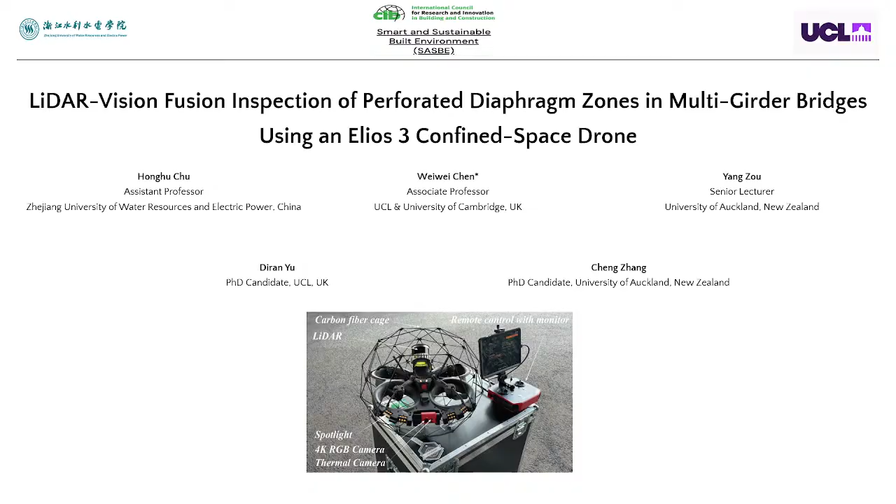Okay, let's see the problem statement. As we know, there are inspection challenges for bridges, especially the corners under the bridge, the deck part. In multi-girder bridges, the underdeck is usually deep, narrow, and also very dark. So the environment is not perfect for us to detect. Based on the difficulty for human beings to inspect, we want to see if there is any better solution we can provide to address this problem.

So first, the GNSS signal is blocked by the bridge deck. Secondly, the illumination is very limited because it's very dark. And thirdly, the available headroom and the line of sight are highly constricted. So in many cases, inspectors need scaffolding, lifting equipment and rope access, but it's very risky. Another challenge is about the data quality.

Manual inspection often depends heavily on the inspector's experience, and quantitative and traceable documentation is also limited. So the key research gap is that most existing UAV workflows focus on the external bridge surface, but robust inspection is not very good, especially for the underdeck cavities. So that's why we focus on this problem.

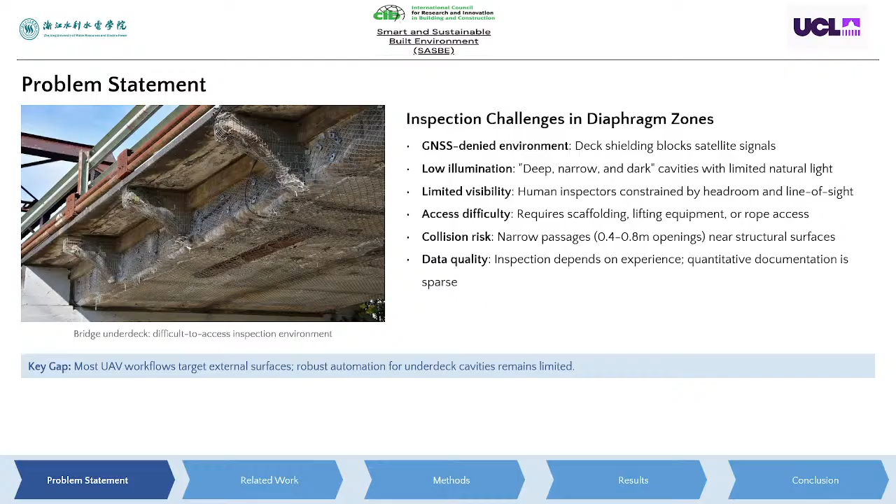As I mentioned, we have three objectives. First, we propose a topological gateway planning method. In our inspection scenario, the diaphragm openings are not treated as obstacles; instead they are modeled as traversable gateways between adjoining girder bays. Secondly, we developed a LiDAR vision fusion pipeline. This pipeline is based on LiDAR SLAM, so we provide geometric reconstruction and coverage verification, and the close-range RGB images support defect documentation and quantification.

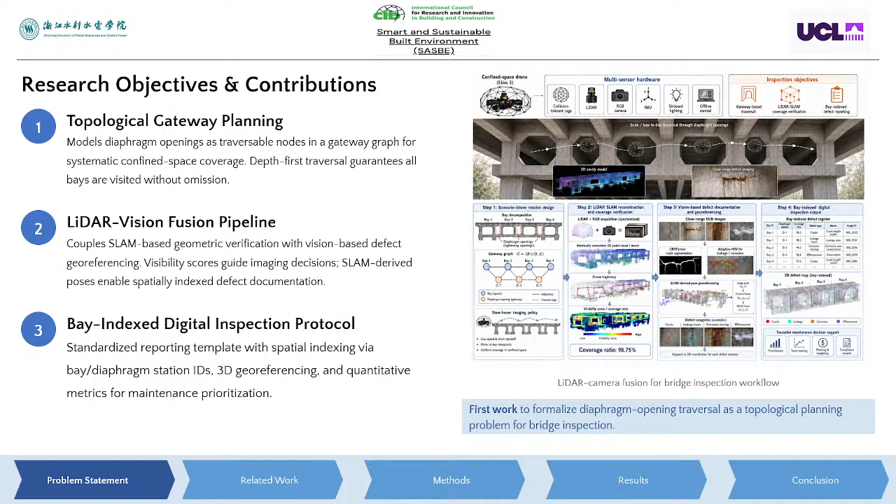Thirdly, we designed the bay-indexed digital inspection protocol. This protocol allows each defect to be linked with the surface bay. Based on that, we can make the inspection results more useful for maintenance decisions. So overall, that's our solution.

There is a lot of UAV bridge inspection work people have done, right? And we try to see if there is any new device we can use. Earlier studies mainly focused on the near surface. We fly the UAV, the drone, to capture images, and it's visual-based control. More recent work has paid more attention to image quality, safety issues, and operational feasibility.

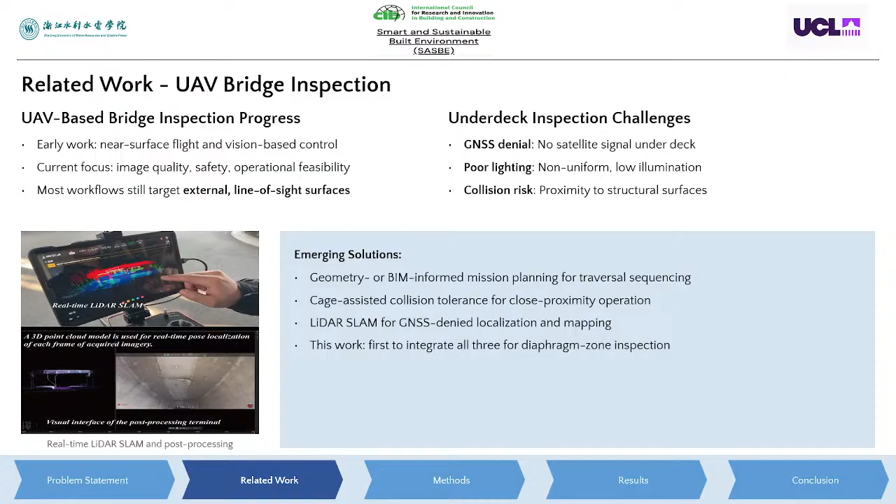However, most UAV inspection workflows are still designed for the external and line-of-sight bridge surfaces. The underdeck part is more challenging because it is GNSS-denied, poorly illuminated, and close to the structure surface. Some emerging solutions have come, based on BIM-informed planning, collision-tolerant drones, or LiDAR SLAM. But the integration of these technologies is still limited. So we want to explore more. That's the motivation of our work.

Another related area is 3D reconstruction and vision detection. As we can see from the table, we compare different solutions, like SfM, photogrammetry, visual SLAM, and LiDAR SLAM. After comparing these, you can see LiDAR SLAM provides the 3D spatial context, and RGB imaging provides detailed defect information. So that's our integrated pipeline.

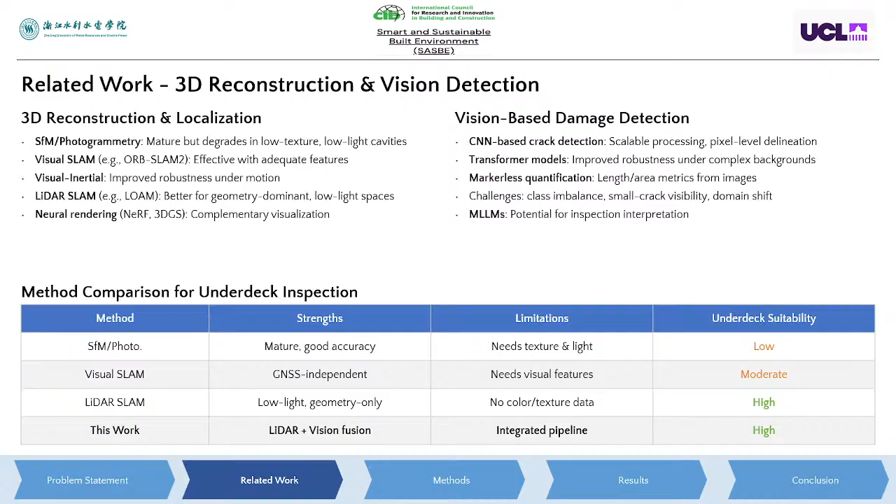Based on that, we searched for a device we can use. This one is commercialized. It's the Elios 3 platform, and it provides advantages for inspection. The first important component is the collision-tolerant cage. It can protect the drone even when it's very close to the surface of the bridge.

The second component is onboard LED lighting. This is very useful for the dark environment, so we can still get high-resolution images. Thirdly, the LiDAR sensor supports real-time SLAM mapping and localization without GNSS. So even there, we can still get data.

Finally, the RGB camera provides very close-range visual evidence for defect documentation. In our workflow, you can see the system can operate offline, which is very important for restricted or network-limited environments.

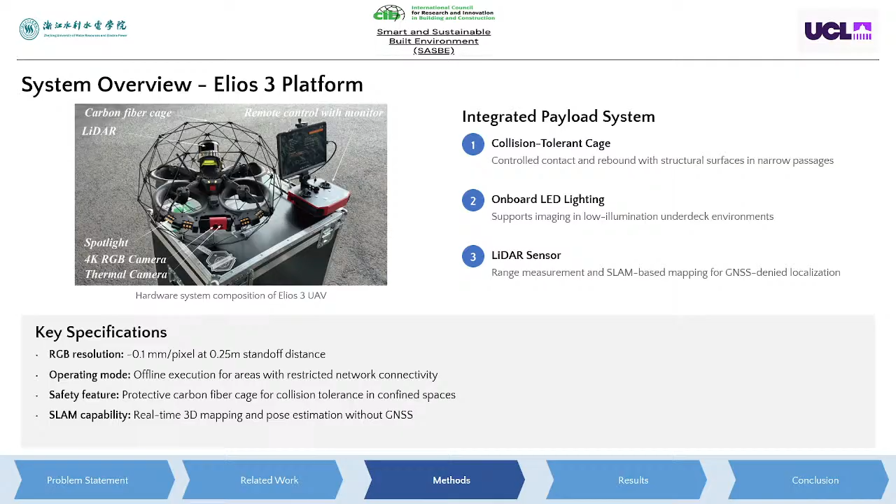And also based on that, we have 3 steps. That's our mission design. In step 1, the region of interest, the ROI, is decomposed into the girder bays and the diaphragm stations. So each bay is assigned a coordinate in the local frame. It's useful for the later reporting.

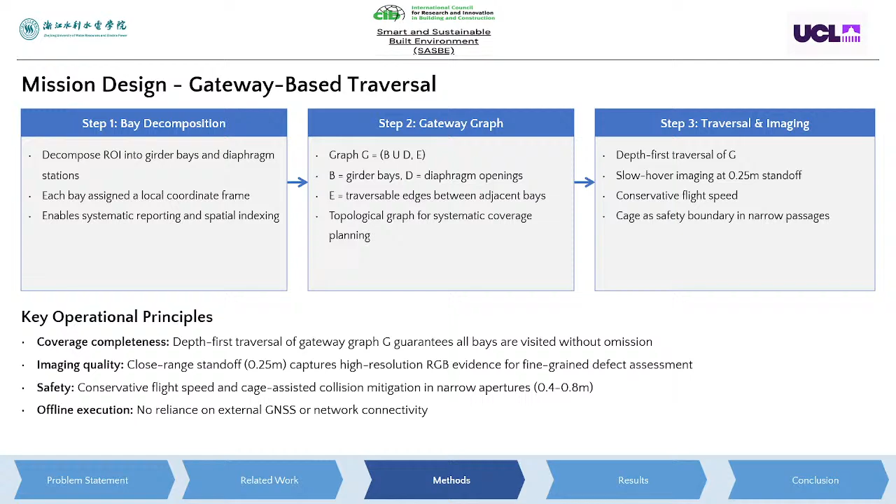And in step 2, the diaphragm openings are modeled as nodes in one gateway graph. So the girder bays and the openings are connected by traversable edges. In step 3, the drone follows a depth-first traversal strategy, so we can visit all the bays systematically during the flight. The drone can perform close-range imaging at a standoff distance of about 0.25 meter. That's the 3 advantages in our solution.

And afterwards, after we aggregate the data, the LiDAR SLAM is used to reconstruct the inspected underdeck cavity. The 3D reconstruction is not only for visualization. More importantly, it allows us to verify the inspection coverage quantitatively. The coverage ratio is calculated based on the surface elements whose visibility score is above a predefined threshold. The visibility score considers the LiDAR rays and camera information.

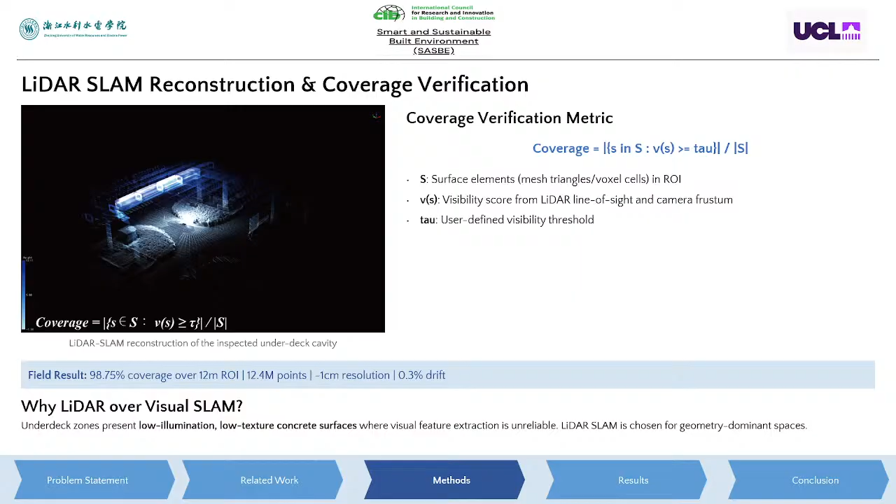So in the test field, we realized it can achieve 98.75% coverage over the 12 meters ROI. And also we get 12.4 million points, about 1 centimeter resolution. I can show that clearly later.

And the next part is about the vision-based detection, documentation, and quantification. For crack detection, we use a transformer-based crack segmentation model. It's the CBRFormer. We also published one paper before regarding this; you can refer to our publications. After segmentation, the crack length is calculated using the skeleton, and the crack width is estimated using the distance transform.

And for the leakage and corrosion defects, we adopt thresholding and morphological cleaning, so afterwards we can calculate the area and the length metrics. The key advantage of this solution is that each RGB image is associated with a SLAM-derived pose. So the detected defects are not only visible in the image, but also linked to 3D coordinates.

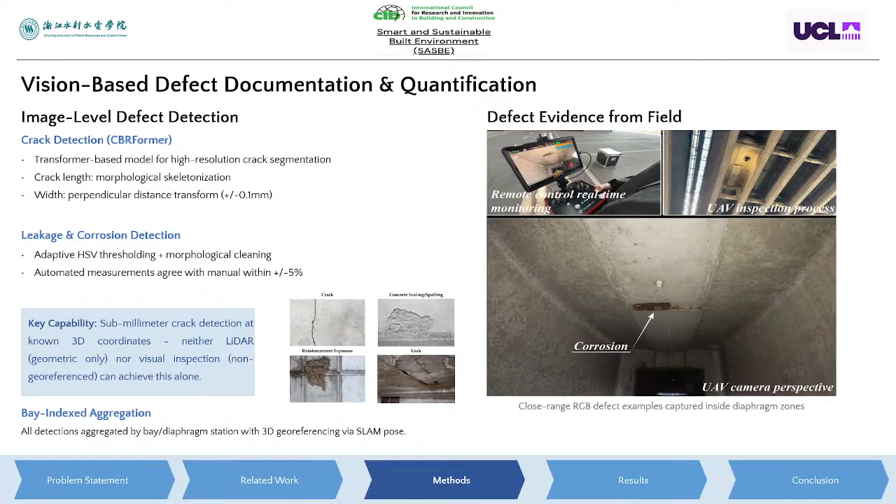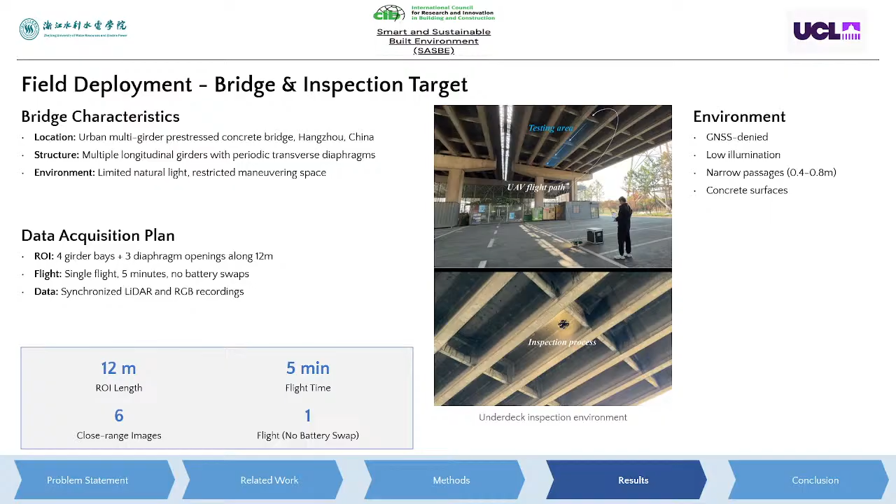And for this case, we tested our workflow, our solution, and we selected one bridge in Hangzhou in China. We selected around 12 meters long and flew this device once. It took 5 minutes. And finally, you can see we got the ROI, the 4 girder bays and the 3 diaphragm openings along 12 meters. And the data is synchronized with LiDAR and RGB recordings.

Afterwards, we did the comparison between the manual solution and the solution with the Elios 3. You can see from the figure, we reduce the time 80%, from 25 minutes to 5 minutes. And for coverage, manually we can only cover 65%, but with this solution we can cover 98.75%. And the minimum standoff is reduced to 0.25 meter. And for safety, we reduce the risk, so the risk is low in this solution. And the digital traceability is high. And we don't need humans to enter; it's based on this device.

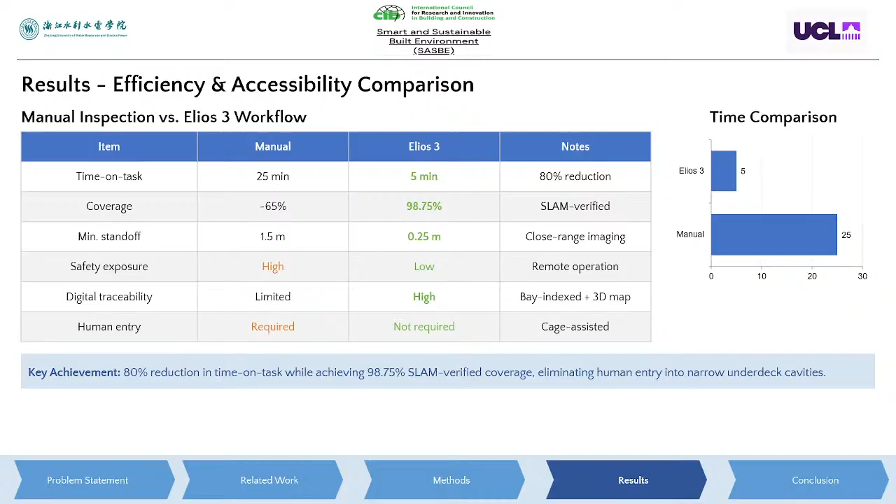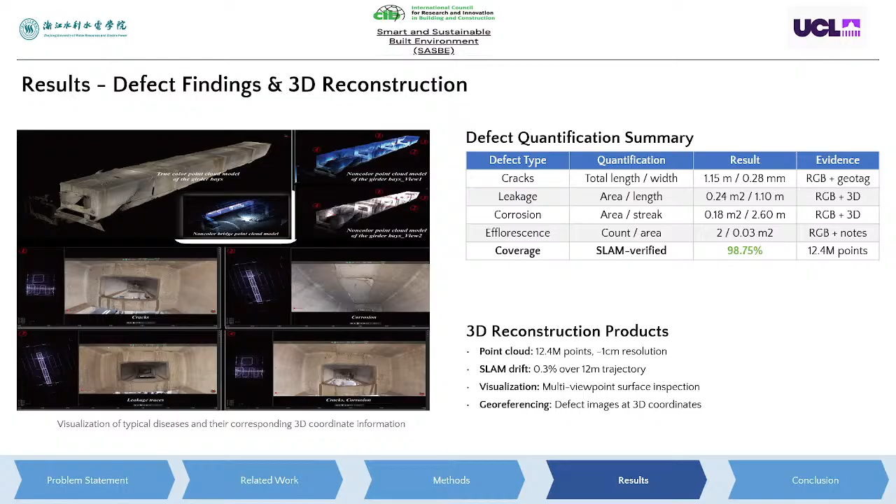And for this example, we compare 4 types of defects: crack, leakage, corrosion, and the efflorescence. And also we compare the coverage. Based on this solution, we can get different evidence for the different types of defects. For the crack, we get RGB and geotags; for leakage, we get RGB and 3D; and for corrosion, RGB and 3D. So that's all the information we can collect based on this solution.

And finally, until now, we have defined the workflow based on this device. The confined-space drone workflow enables systematic bay-to-bay traversal through the diaphragm openings, and we reduce time by 80% and increase the coverage. The coverage is SLAM-verified. And the 3D spatial traceability is also very useful for the next step. And this is the first work to formalize diaphragm opening traversal as a topological planning problem.

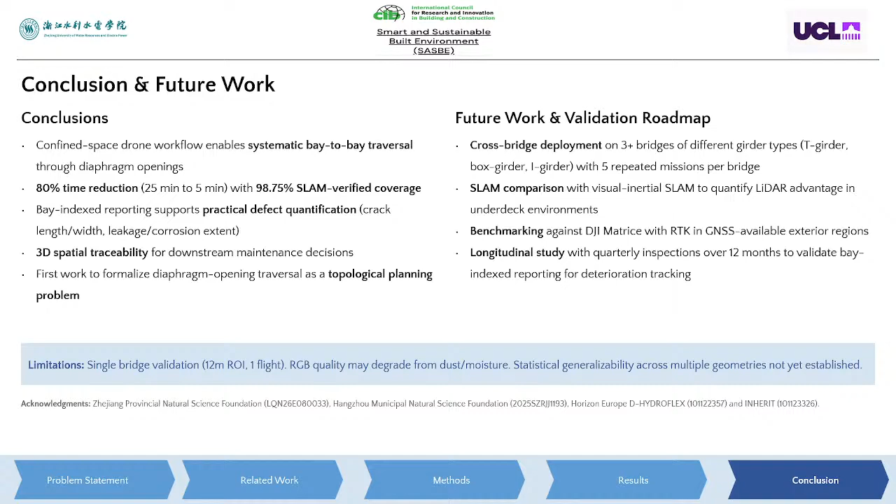But there are still some limitations, because we only focus on one bridge. So in the future, we want to focus on different types of bridges to test our solution. And for the SLAM comparison, we want to quantify the LiDAR advantages in the underdeck environment. And for benchmarking, we want to explore more. And for a longitudinal study, we need to consider over 12 months in the future. So that's the overall solution and conclusion of our research. Thank you very much for your attention.

Many thanks for your presentation. It was really interesting. So we're taking questions right now. Do we have any questions here? Nothing? Yourself. Okay.